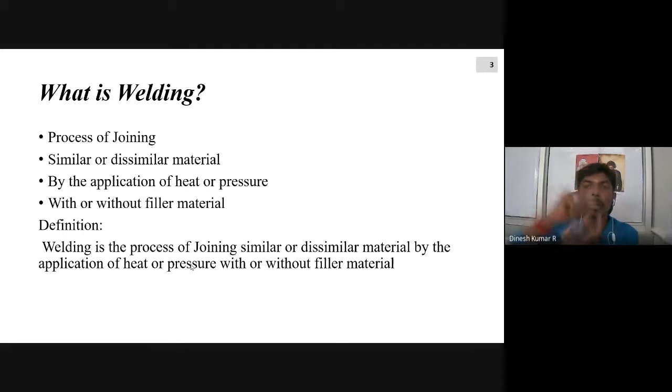So this is basically what welding has to do, and using this a lot of technology got developed. It's like basic welding process works on the principle of short circuiting, and what we are going to study today is completely on mechanical automation - you don't have anything related to current or electricity. There is a small friction which is needed to create energy. To explain this, in earlier days how we would rub two stones and create fire - same process here, what they do is plastic deformation. That is what is going to happen in the FSW process.

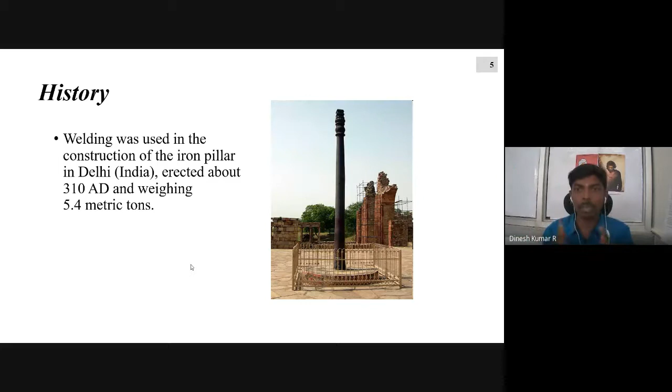About Indian history of welding - how many of you know this, I'm not sure. This is something which was erected in Delhi in 310 AD. This is India's first welding structure which was introduced in India. Before this, the concept of welding was nowhere in India - I'm speaking only about India. Before that, India didn't know the concept of welding. But to erect this, they needed to have some joints which were to be actually molded by welding. That's how welding was actually introduced to India.

After that, what happened - of course, there should be some evolution over a period of time. What happened was some forging technique was used, like it was heated, it was screwed, and it was joined.

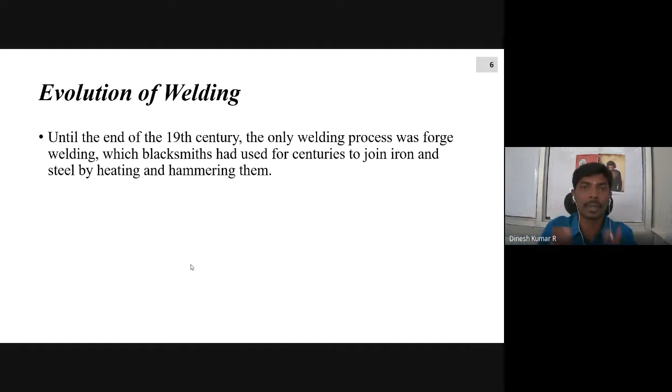There was introduction of gas welding, like oxyacetylene gas or manual metal arc welding. But earlier it was started with blacksmith welding, like in our blacksmith workshop, that was the first welding or joining technique introduced. There was an evolution, then there should be evolution to have these many processes.

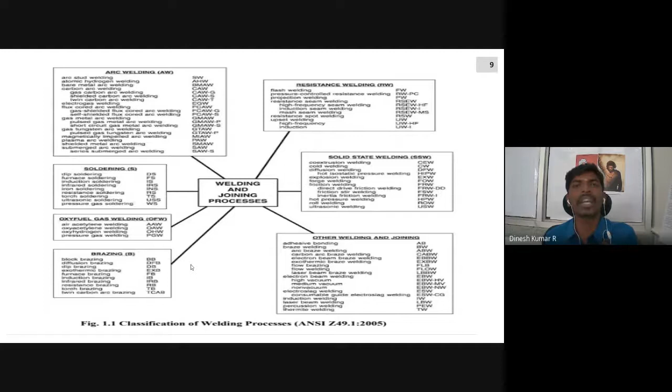So we got plenty of welding processes, and the topic for our discussion will be only based on solid state welding process, exclusively on friction stir welding process. Solid state welding process, as I said before, is like our blacksmith workshop welding, a blacksmith technique where they heated something.

They kept it together, applied some force, and both were getting fused together after solidification or after cooling, both making a bonding. That's how welding was happening earlier.

From that, what was created is friction welding, a further technology. What this does is, mostly dissimilar materials which cannot be welded together, they used this particular process called friction welding. Maybe you have seen this in a workshop where carbide tool tips are being brazed.

Earlier, during this particular operation, the tool tip was actually kept idle and the rod, like mild steel or HSS, was rotated, and both were brought together. At a point when both were getting heated up, they fused together. That's how this friction welding concept was working.

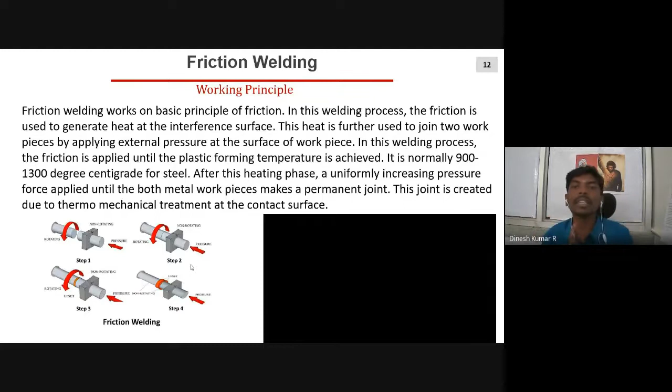But our process, what we will discuss today, is completely on friction stir welding. In friction stir welding, how does it differ from friction welding? Friction stir welding is just a stir technology which uses mechanical force or frictional force to join two materials. So the best advantage of this particular process is that it does not consider what material is being used.

This does not consider what tool is being used. This will not consider the aspect ratio of thickness. Now even 100 thickness can be done with two passes, where a single pass can weld even 50 thickness - there is no constraint in this.

If you go for manual metal arc welding or TIG welding or MIG welding, what is the problem there? You have to fill the material layer by layer, and over stages you have to keep going. That is what we call wire arc additive manufacturing.

When this process is running, what region do you get? Now if you're doing welding, you have a core like this, and you have to fill from here, then here, then here, then here. The problem that arises here is that there is an inter-bonding between this particular layer and this particular layer.

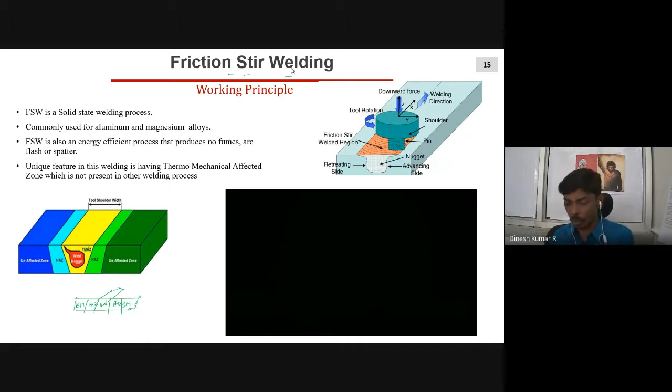So this was the microstructure we obtained during 2219 - yeah, aluminum alloy 2219, AA2219. You will not get this material anywhere. If you want to work on this particular material, you can collaborate with ISRO or DRDO. So they have this particular material.

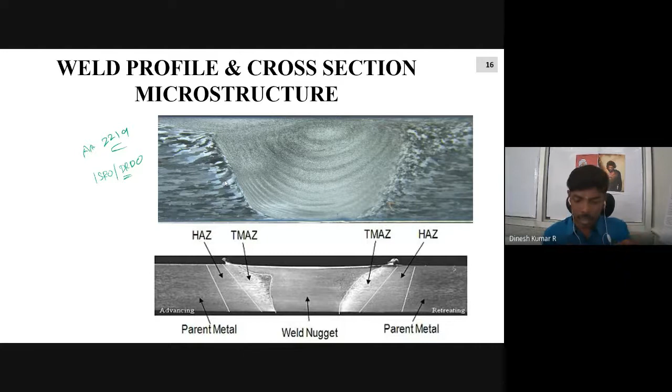The beauty of this material is what they call the ductile to brittle transition. When there is an exposure of change in temperature, this particular material has the property of achieving a better ductile to brittle transition across a wide range.

This is about, I just want to show what machines I worked on. This machine I worked on in NIT Trichy. We have a specialized FSW machine, and the same machine is available in ISRO as well.

For those who want to work on FSW, it is not required to only go with this particular setup. A customized CNC milling machine can also be used as an FSW machine.

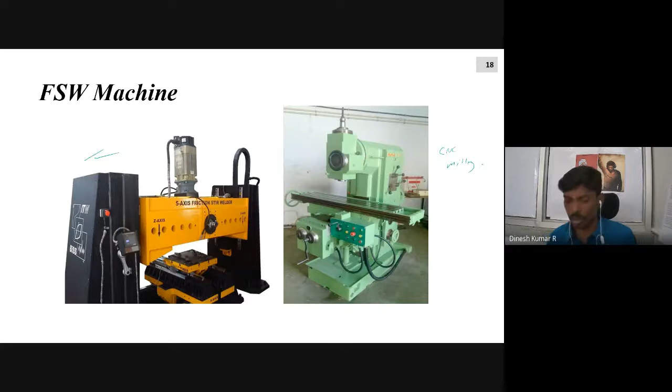The major joining process here is like other welding processes. You can go for plenty of operations, either butt welding or lap welding, where this process of making layer over layer gives rise to friction stir additive manufacturing (FSAM). This is a new trending technology happening in this field. It can also create many profiles - it's not that this can only be used for creating butt joints. It is also applicable for many joints based on the profile you require, right?

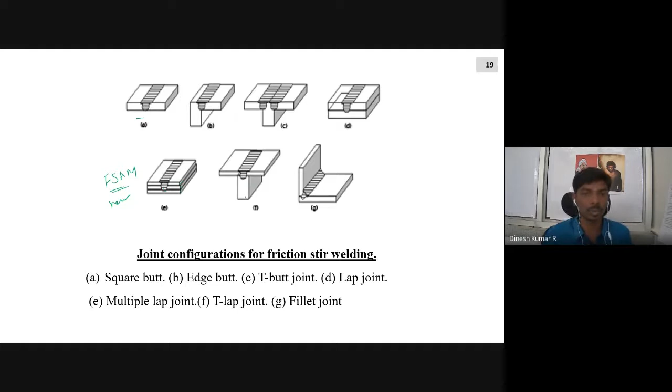If you consider the major parameters in this, obviously when you go for welding you have current or voltage which is controlled, the standoff distance or arc distance which is to be maintained, and the speed - the travel speed at which the welding happens. If it's going to be laser, what is the laser source you're going to use, or what is the focal point you are going to have.

So you have plenty of parameters which decide the welding impact on your material. Similarly, this FSW process also has some parameters attached to it. They are generally rotational speed, where the tool rotates at a particular RPM, then comes your travel speed - after rotating, the tool moves out with a particular travel speed, maybe say 100 mm per minute or 200 mm per minute. It keeps on rotating and moving.

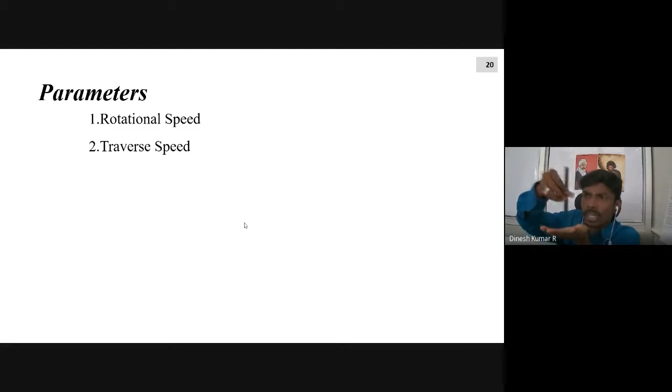Then tool profile. So if you consider tool profile, there are plenty of tool profiles. The best one is said to be tri-flute, which is quite costly and quite critical in manufacturing, but still we are quite comfortable with triangular or threaded tools. That is also giving better efficiency. Then tool tilt angle.

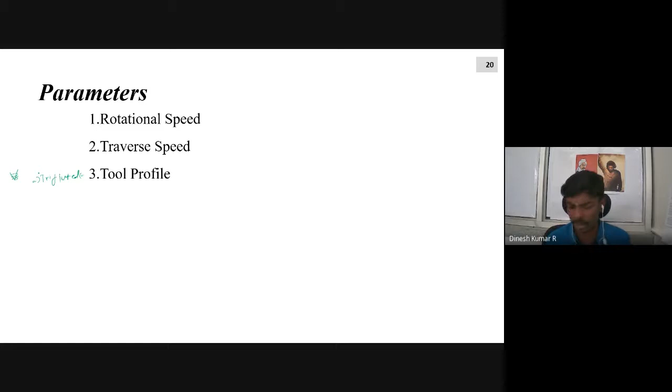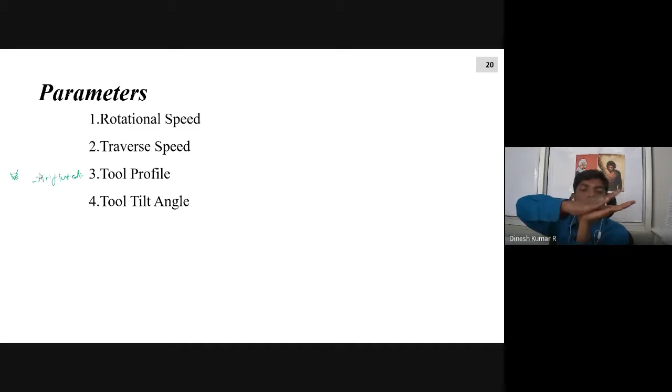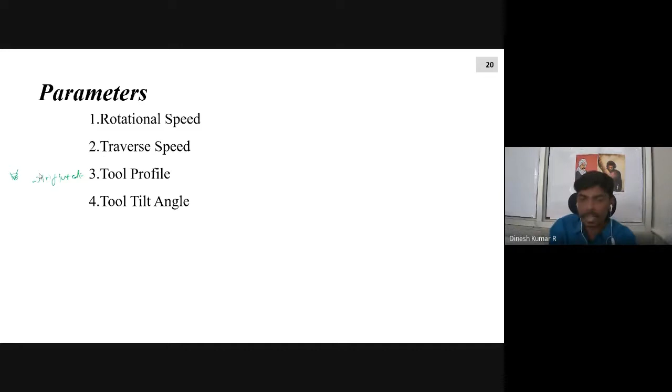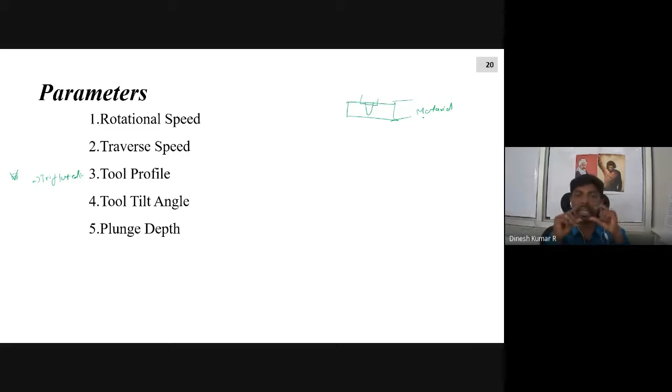It's like a boat structure, the aerodynamic shape where it slides at the front and compacts at the back. So we have one more parameter called tool tilt angle. Then plunge depth. For plunge depth, you have particular parameters where you want to do welding till this, and your shoulder will be resting over here. So what should be the plunge depth based on your material thickness? That is also going to be defined. For different material thickness you will have different plunge depth.

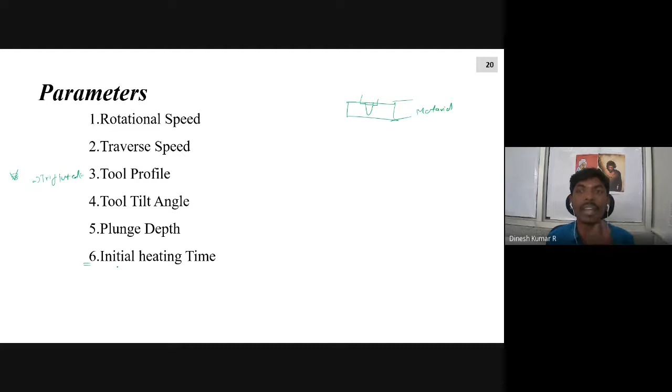Then initial heating time. What is this initial heating time? You are going to plasticize the material and fuse it. You are not going to completely melt it. You are just going to plasticize the material. You are going to introduce a tool, and heat is generated by the frictional force being created, and that frictional force is going to create semi-solid metal layers through the process. The time required for creating those semi-solid metal layers is called the initial heating time. With that, we'll have a clear understanding of how much it is required, and this can also give you a better result.

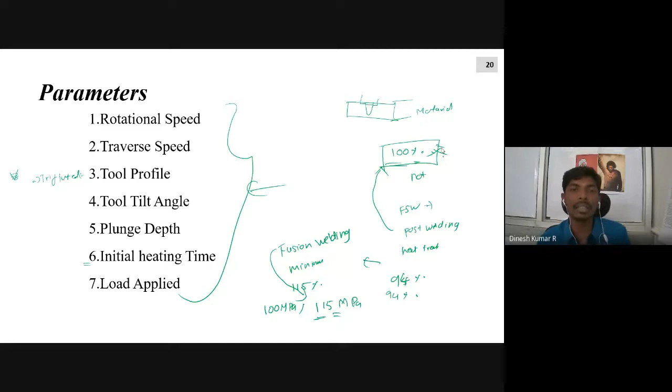When you are going for a bigger component which is a completely non-weldable grade, this is found to be the better solution. This process lets you join any material regardless of its characteristics, completely without any problem. But the only deficiency of this process is it will never get 100% efficiency unless some post weld heat treatment is happening. One more defect is end hole generation at the end of the process due to the impression of the tool.

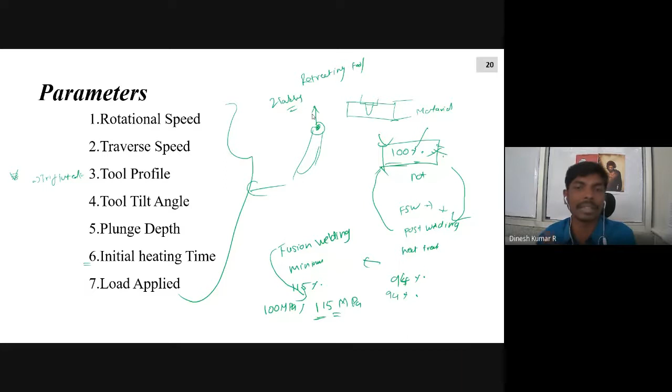This can be addressed by post weld heat treatment and by a retracting tool. There is a tool called a retracting tool; I'll show everything in future. That tool costs around 2 lakhs, so we Indians cannot afford 2 lakhs for each tool. So நம்மகிட்ட இருக்க டூல்ல we will always have this end hole formation. We use some jugaad technique to eliminate that as well. I'll explain the complete process and the journey I faced in ISRO.

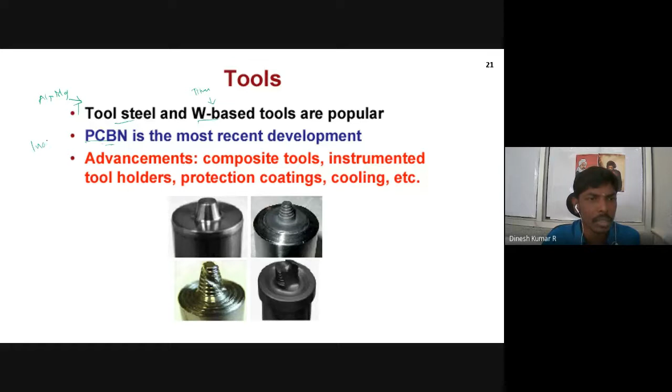These are the different tool profiles. Mostly PCBN, polycrystalline boron nitride, tungsten based, and tool steel are used. For aluminum or magnesium, tool steel is more than enough. For titanium based welding, you have to go for tungsten based. For inconels or super alloys, you have to depend on PCBN, polycrystalline boron nitride tools. These tools are quite costly. Ours cost around 6,000 per tool, and PCBN will be much higher because it is completely sintered and produced.

Profile பத்தின normally we are okay with this profile. Normal welding போகணும்னா this profile is more than enough. If you want better quality, you can go for this threaded one. Why threaded has better efficiency அப்படின்னு கேட்டீங்கன்னா, I'll give you one more example.

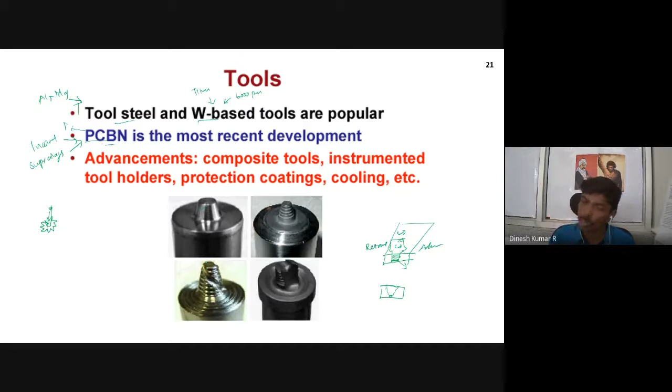If you look at the bottom, you will have some defect like a tunnel defect, where the rest of the things will be there. This is majorly because you have made a wrong threaded side, where instead of pushing the material down, it pulls the material. And if you look at all these, mostly everything will be created in order to push the material down, so that you will get a lot of input in getting it down.

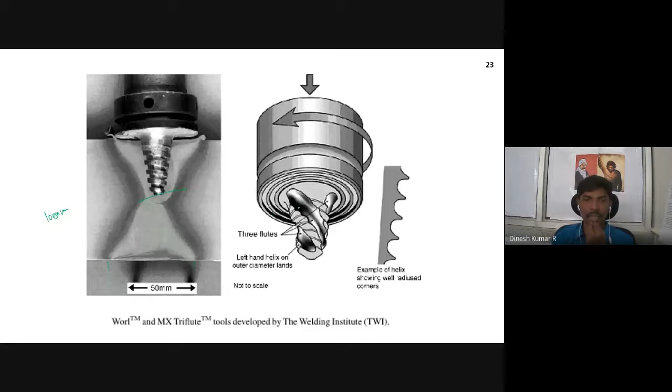And there is a ratio which can be maintained, where your shoulder should be around 3 times that of your tool. That is, if your tool diameter is 6 mm, your shoulder should be around 18 mm. This is the basic thumb rule which is to be followed in manufacturing any FSW tools, right?

So after that, this skew angle, like we started producing, because if we do it this way, with the eccentricity there is again going to be a lot of collision. There is again advantage as well as disadvantage because of the packing nature which is to be done. So in that line we can go on tool proportion.

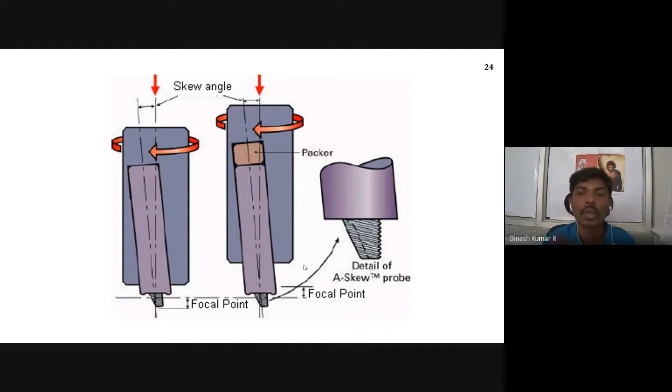So as I said, tri-fluted is the maximum, but we work on a maximum of 12 mm plates; mostly we'll go for 6, 4 or 8 mm, maximum 10 mm. That is all we are going to do FSW on. So cylindrical threaded is more than sufficient for our working nature of the tool, like whatever research we are doing.

Alright, another thing here: you should understand the basics of this particular process on metal flow phenomena. If you ask what the metal flow phenomena is, there are two types of metal flow in this process: a first mode of metal transfer and a second mode of metal transfer. The first mode of metal transfer is completely done with your shoulder, and the second mode is completely with your tool. So there you will have a tool locking mechanism.

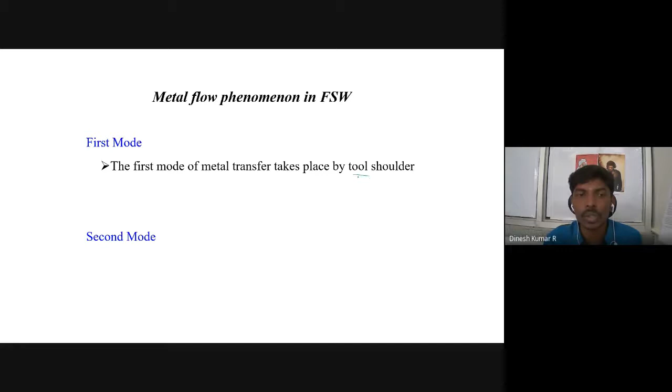The first mode will have a revolved profile where all the material is getting revolved, and the second mode of metal transfer will be completely compaction in nature, where the material getting skewed in is compacted and makes a flat profile. This is how your first mode and second mode differ. Your first mode takes place by the tool shoulder, at the top, and your second mode is at the downside, completely with your tool.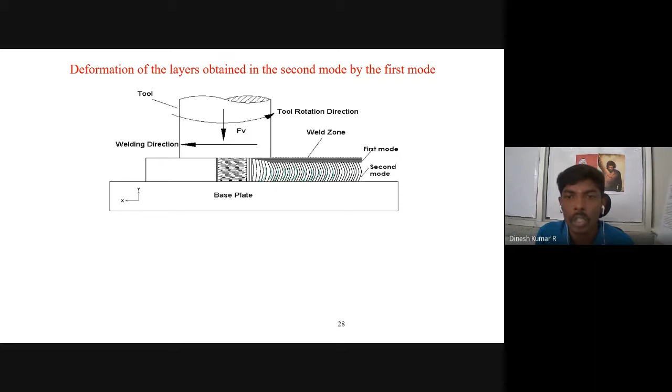So first mode and second mode of metal transfer is also a phenomenon where you can work on a few research aspects. So here you can see the first mode is something like this. Here in the second mode you will have materials over here, like this. So your second mode will be something like this, where all your materials are skewed or rolled around, and the first mode will be a flat profile where it will be completely compacted by the action of your shoulder.

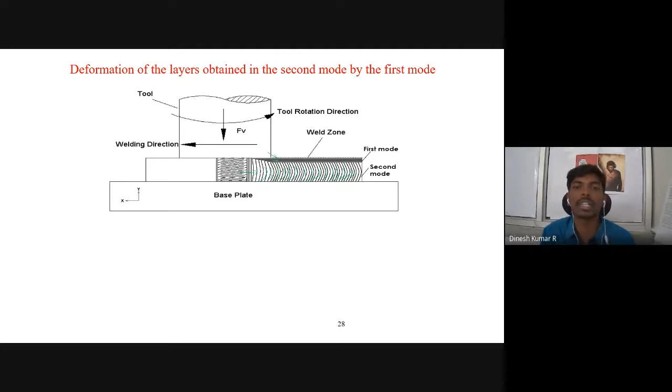That is what gives you your first mode of metal transfer, and this tool profile is completely responsible for creating your second mode of metal transfer. To understand this, the better efficiency can be obtained with your onion ring formation. Onion ring formation is also going to give a better impact on this. If you are getting a better onion ring profile, then your complete profile is said to be best on its own because of this particular welding process.

So to identify this, we are quite crazy in getting things. This was a trial done by our professor Dr. S. Muthukumaran from NIT Trichy. He was explaining to us how the first mode and second mode differ and what happens in the onion ring formation. So it is rolling of material; it keeps rolling inside. So we are going to look at its cross section. Whatever you see here, this is what is represented over here.

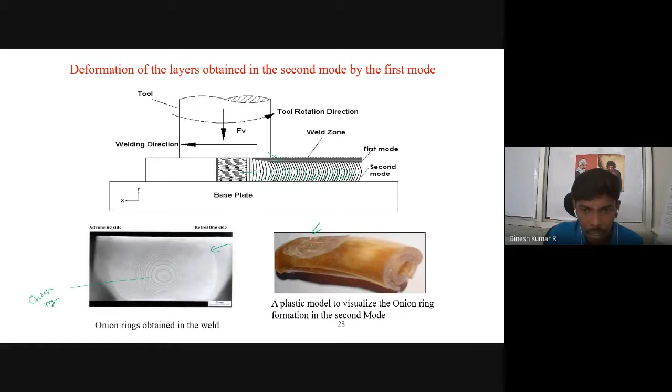The onion ring formed here is visualized like this in cross section. Right, again we did something on this fractal analysis, where for the first mode and second mode we introduced some MATLAB design with some coding using machine vision. Now people are doing it with machine learning. It was machine vision earlier, now it is machine learning to predict the feasibility that can be obtained

from this particular process. Right, that is all about how the process can be optimized or utilized if you want to do any research. And I think I have clearly given you the places where we make defects, like how to make a thread profile, how to make a profile, how to eliminate your defects. Those things were given to you completely to start up with your research.

Okay, now I'll explain what my research was and the journey I was handling. My clear objective was to weld AA2219. It is said to be a non-weldable aluminum alloy which has better mechanical properties from -250 to 260 degrees Celsius. They call it the brittle to ductile transition. When the temperature changes in a particular environment, the material will lose its property. When the material property changes, the ductility of the material will be converted into brittle nature because of the sub-zero temperature.

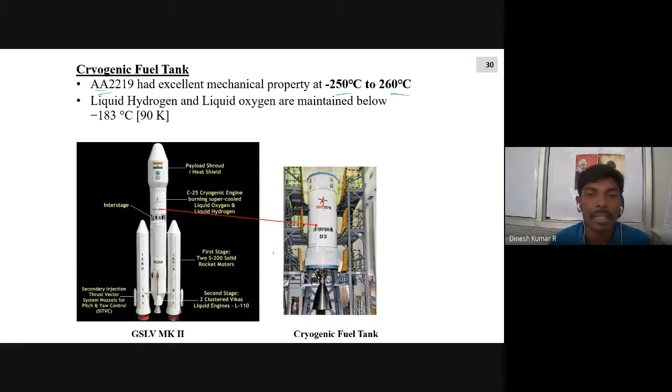So we were working on cryogenic fuel tank welding. In cryogenic fuel tanks, the liquid oxygen or liquid hydrogen is maintained at -183 degrees Celsius. If you go for other steel structures and the ductile to brittle transition happens, the steel will turn like glass. If you hit it with a small stone it will break. It becomes that brittle. So you should have a material which can sustain varying environments, either 260 degrees or -250 degrees, without any mechanical failure, so that when it is going to space it is not going to have any problem.

So we started working on this AA2219. Earlier this welding was done with the TIG welding process, where they were getting only 40% efficiency because aluminum TIG is possible only with AC welding. Our prior focus was to increase it to at least 80 to 95. But we were not able to reach that much; expectation and reality are two things, right? For AA2219 we got around 75% efficiency, and for dissimilar welding of AA2219 and 2014 we got around 88% efficiency. I'll explain how we achieved that level.

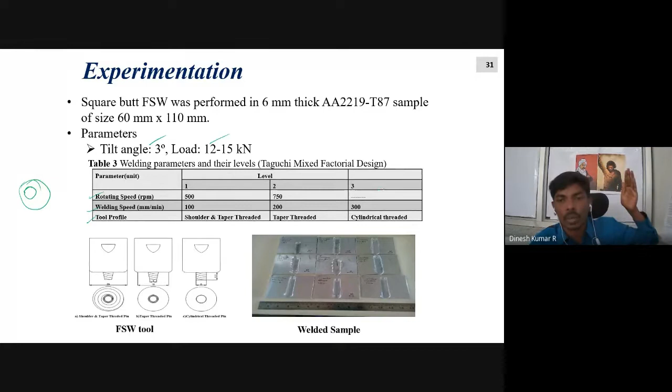We did a lot of trials optimizing the process, and we fixed the tilt angle at 3 degrees. We kept the load stagnant at 12 to 15; it was auto-generated load because we kept it as position control. So we were majorly focusing on rotation speed, welding speed, and tool profile to get our output. Before getting the actual welding process design, we worked on different sequences for optimization. We did trials from 500 to 2000 rpm, then 100 to 500 rpm, and found this particular range far better.

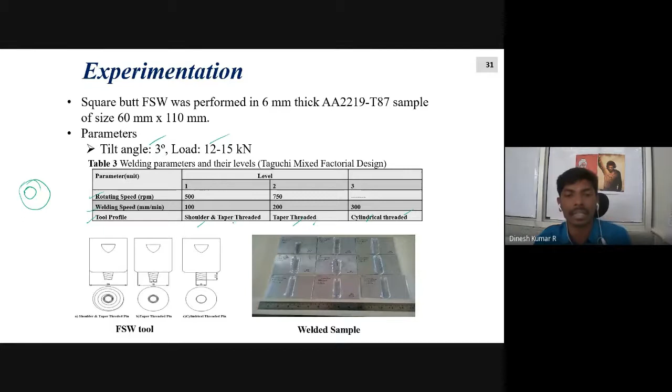We eliminated a few stages, narrowed to this domain and compared three profiles. Some people said the cylinder tool is good, some said taper is good, and a few said threaded shoulder and taper gives much yield. But we had to try what actually happens. So we welded and got some better parameters. Then how to improve it? Once your welding is done, you are getting a perfect weld without any defect, right?

Is that fine? Can you conclude your process with that? No. You have to further optimize. How to optimize welding sequences? You should know the behavior of the material by doing mechanical or material characterization. After that we started bisecting the material, and tensile specimens were tested. After that we went for cross sectional analysis.

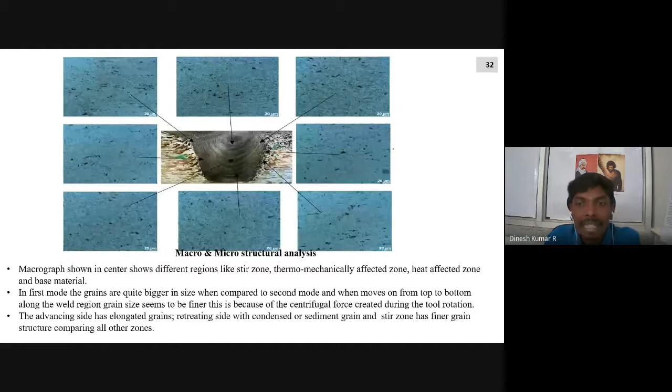But on the other side, this is like the advancing side where there is a pull effect happening. So material is getting pulled and here the material is getting sedimented. So the pull and push grains are seen over here. இங்க மெட்டீரியலோட சைஸ் டிஃபர் ஆச்சு. ஓகே, மைக்ரோ ஸ்ட்ரக்சரை வச்சு we are not able to predict what is the actual defect which is happening in this process.

Then we went for the SEM analysis. In SEM analysis what we observed is there are ductile and brittle regions, like slide tear is obtained and ductile dimples are also obtained. இந்த ரீஜனுக்குலாம் dimples அப்படின்னு சொல்லுவாங்க. அதை பிடிச்சி இழுக்கையில there is a void which is being created. அந்த குட்டி void formation-ஐ dimple-ன்னு சொல்லுவாங்க.

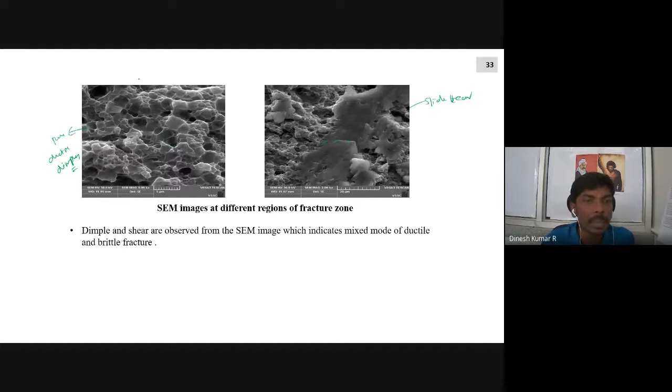இன்னொரு சைடு பாத்தீங்கன்னா this is completely behaving ductile and this is completely behaving brittle. On the brittle side there will not be an elastic limit. நம்ம பென்சிலை உடைக்கிற மாதிரி டக்குன்னு உடைஞ்சிடும். Like glass getting broken: when you test your material it will elongate and break, but when you test glass the elongation is 0, it is completely brittle. ஒரு சைடு பிரிட்டில், ஒரு சைடு டக்டைல், that is a mixed mode of transition happening in the process.

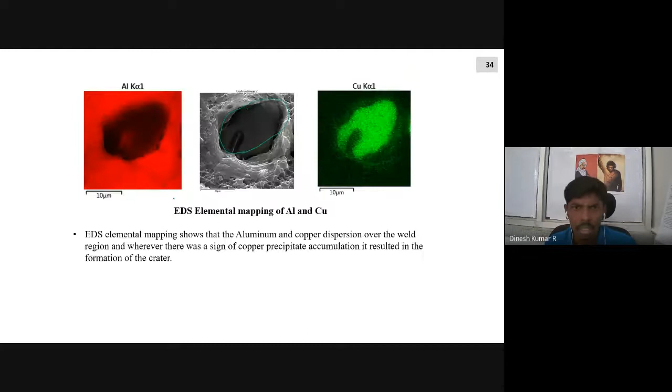அங்க பாத்தீங்கன்னா the scale is 5 microns, the scale is just 10 microns. But our void was more than 10 microns. Come on man, your crystal size is not more than 7 to 10 micrometers, but you have a 10 micrometer void created within your process.

இதுல ரெண்டு விஷயம் இருக்கும். One, your process is not sufficient to get complete packing, but that is not possible, because we have gone for testing. There was no actual defect, no tunnel defect. Then we went for RT and UT, radiography testing and ultrasonic testing. Both found there is no defect in the welding process. So we found there is some crater being generated in the welding sequence that is the major source of failure.

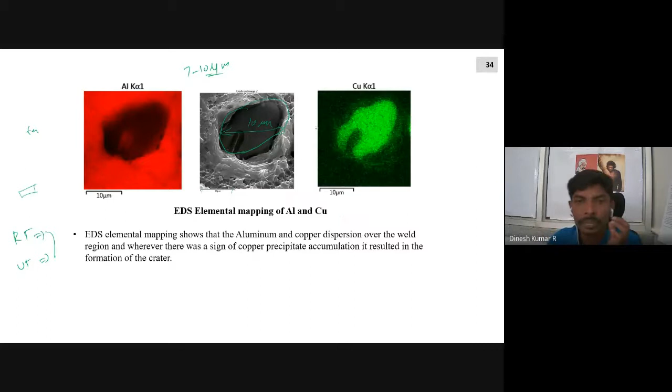இந்த ப்ராசஸை எப்படி ரெக்டிஃபை பண்றது? We were brainstorming. Luckily we came to know that the major composition of this is copper. எப்படி காப்பர் உள்ள செடிமெண்ட் ஆச்சு? It's an aluminium copper alloy where you have around 6% of copper throughout.

Due to the centrifugal force, the saturated copper started getting accumulated or agglomerated at a particular point, and the weight ratio varies. The copper will be higher than the aluminium. When it's heated and refined, that portion of copper started accumulating in a particular place.

When you have a complete crystal with a small dent, breakage happens only at that spot, there is no proper bonding. Rest of the material is similar, but there is one inclusion or foreign body entrapped in the material, and at that spot you will not have enough bonding.

What is happening is it creates a crater because of the accumulation of copper which has only partial connection, not having better connectivity with the aluminum, creating a small loop. The failure is maximized there. So the only aspect is to disperse this copper which is getting accumulated or agglomerated in a particular point.

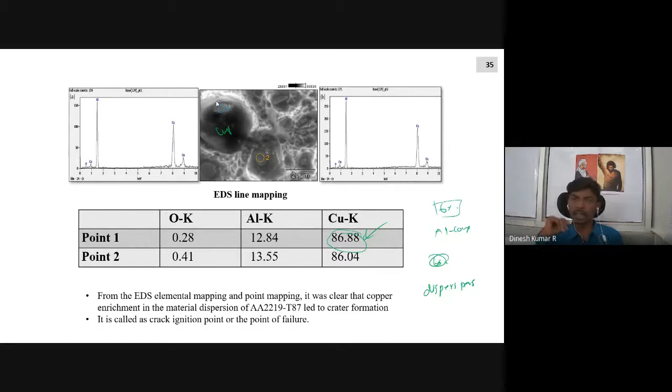Only thing we have to do with the tool is, like when we churn curd well, it gets dispersed and comes out. But if our tool profile is different, then only in that spot it will wrinkle off and generate. The same thing we were applying here.

Here what happened is the profile that was created was not good enough in order to split the copper precipitate or disperse the copper precipitate uniformly. So we started introducing a flute like

a small flute-like pulsed mode we started introducing. Earlier the tool profile was continuous, so it was going on a continuous process. Then what we did is in this particular tool over the string we introduced a flute like a small cut. So what happens is it will create a pulsating action where it is not a continuous flow, it is going to be a pulsed flow.

In this we were not able to get a better efficiency - this is all we were able to achieve. Around 75% of the parent material strength was able to be applied.

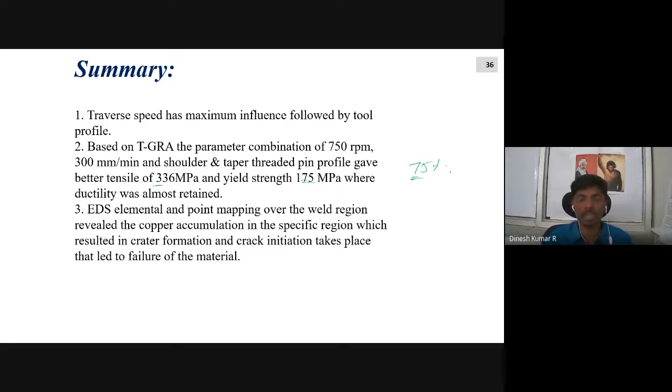Then we tried adapting that particular process on dissimilar welding. This was still more complicated because this is not the same material. With the same material at least stick welding is possible. This 2014 and 2024 are two materials which are called structural elements. It is completely impossible to weld with any process. Even TIG welding is not possible for this.

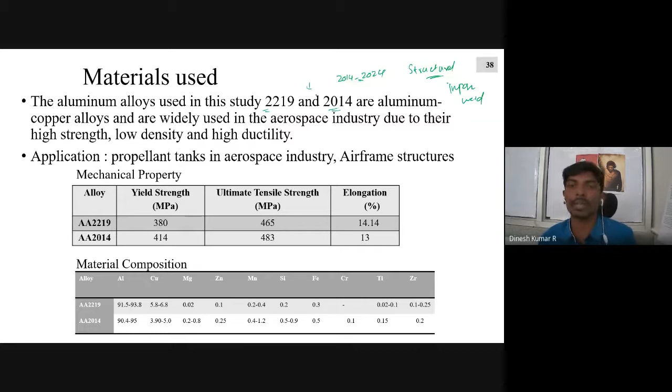In the process we thought that when you go for higher complexity, you will get a better result rather than working on the same result for a period of time. So we planned to take this up. Okay, we'll go with this particular process.

In heat treatment, if someone is doing research and not able to spend more amount for procuring tools - if you use the heat treatment method, the total production cost of the tool will be just 300 rupees, where your machining cost for this particular profile creation will be around 150, material charge will be around 70, and heat treatment - if you have that, you can avoid the rest. If you use the heat treatment procedure, you will get a tougher tool, far better toughness.

If suppose you are using one tool for producing 10 weldings right now, that is highly impossible in FSW because the breakage happens simultaneously. But if you use this tool, I can assure you will get at least 10 to 15 weldings. So this tempering process we used for D5 tool steel.

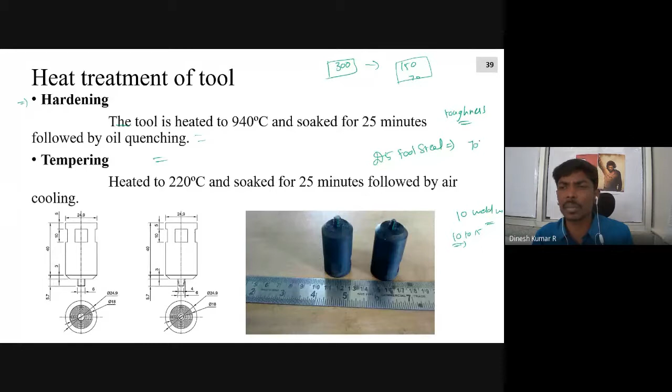There it looked rough. We thought this is not as good as 2219. But we all go with the beauty, right? Beauty is dangerous - that applied here too. Which was beautiful, which had better finish at the surface, that was giving only 75% efficiency. This one was not beautiful, the finish was not proper due to mixing of two materials. There it was only 2219, a single material used. Here it is two materials.

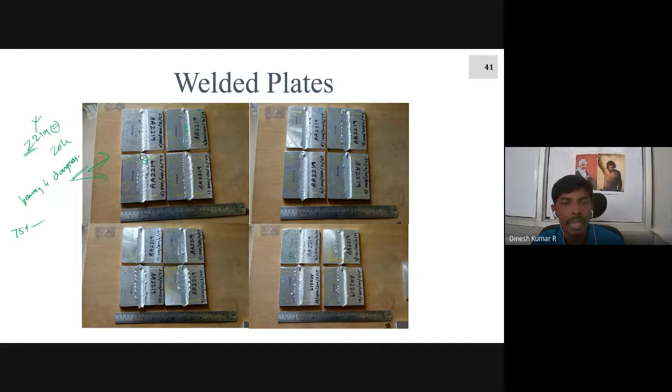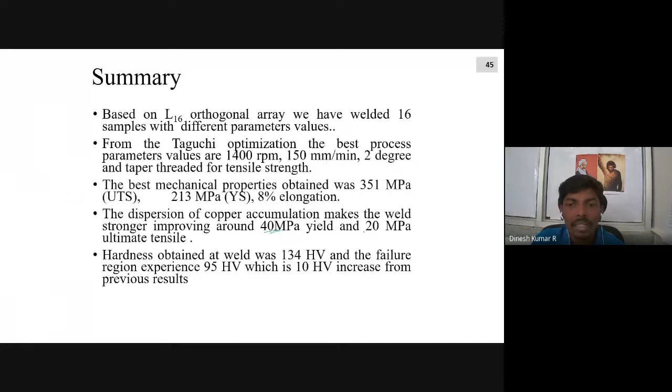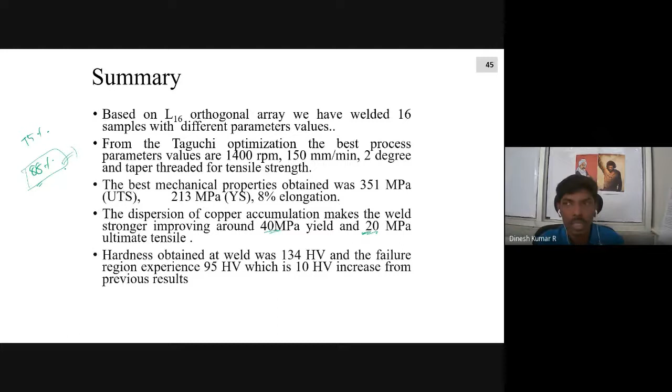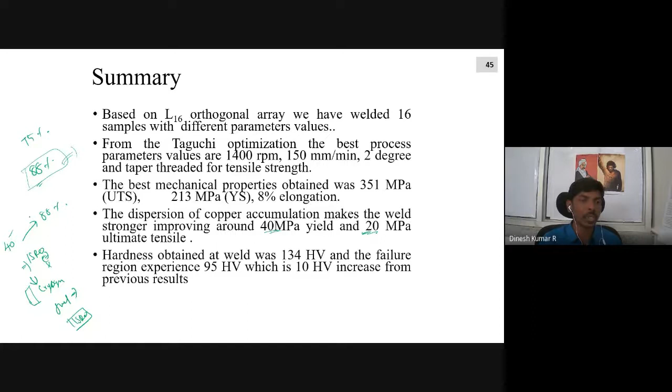So our efficiency gradually increased from 40 to 88%, and now I'm very happy and proud to say this technique has been adopted by ISRO and validated and accepted. Now the joining of cryogenic fuel tanks - few of the fuel tanks - this technique is also getting incorporated in ISRO for manufacturing their fuel tanks, or joining their fuel tanks to get the final output, by increasing efficiency from 40 to 88%. These are about the research I worked on with 2219 and 2014, the difficulties we faced during the journey, and how different aspects were handled to get a product specific output.

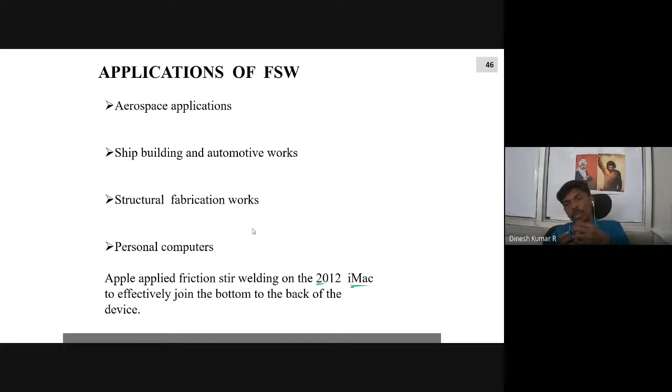So about application - sir, you've done this in ISRO, where all can we apply this - there's plenty of applications starting with aerospace, shipbuilding, structural fabrication. In 2012, Apple used this particular technology for joining the bottom plate and the top desktop with the FSW process. They joined using this technology to fuse both aluminum pieces. So it got wide application everywhere - if you go for aerospace, space capsules, trains or ships, everywhere it has its own applications.

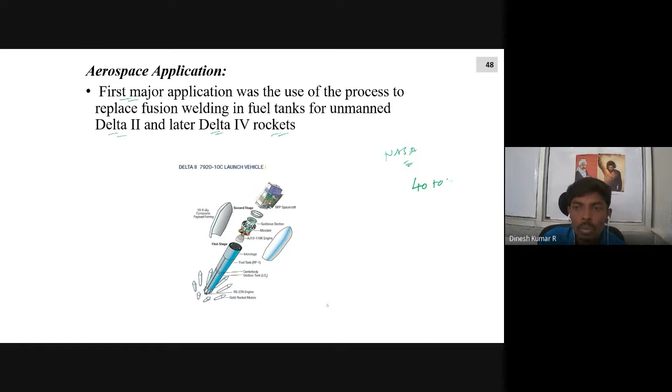The major application in aerospace was in Delta 2 and later Delta 4 rockets. NASA was the first to implement this particular technology for aerospace applications using the FSW process. Right now, around 40 to 55% of the welding of aerospace in NASA is only with this particular technology. They are not using any other technology - they are using only FSW technology for most of their welding components.

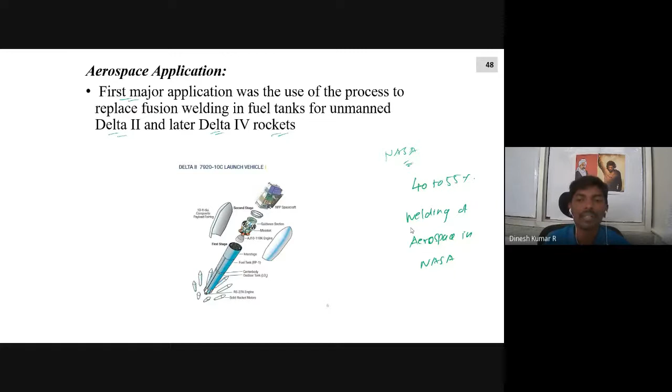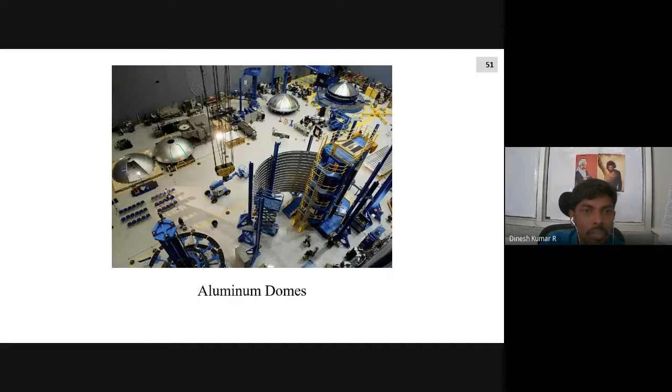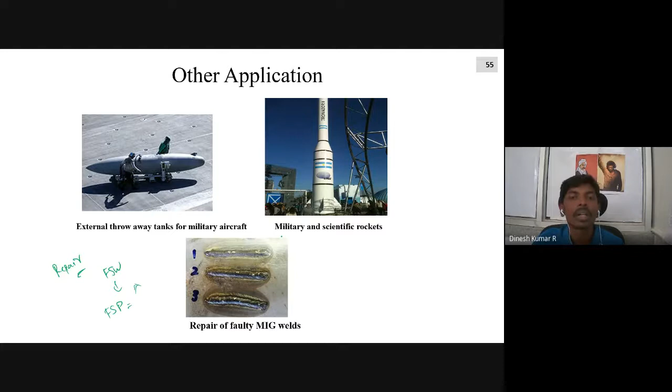Now in our normal fusion welding process, if we get some defect like a blowhole or something, instead of throwing away that welding or reworking on it, if you go for FSW over that particular welded zone, doing FSW on the weld zone will repair your defects and you will get a better weld strength over there. So that is also possible right now.

All right, this is completely about friction stir welding. Other technology available in this is friction stir spot welding, where mostly now Maruti and Hyundai are getting adapted to this.

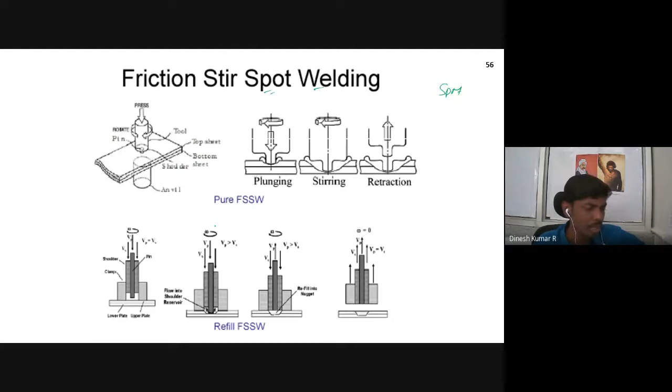Instead of normal riveting and spot welding, companies started using friction stir spot welding. The Mazda RX-8's rear door aluminum panel is completely made using friction stir spot welding processes, and companies are slowly getting adapted to this.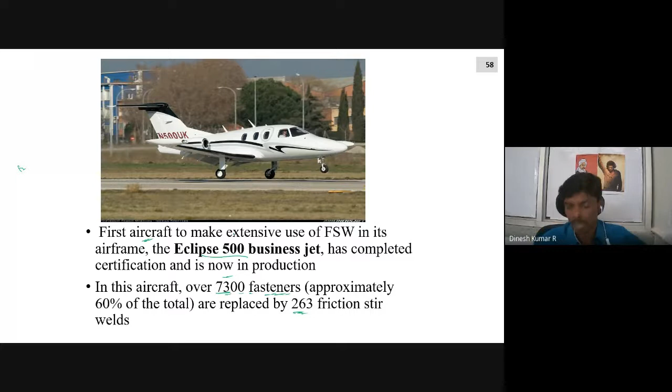The first aircraft made with this technology - if you've traveled in flight and looked at the side wings, everything will be riveted, not nut and bolt, because it has to be rigid. Almost 7,300 fasteners were removed and replaced with just 263 friction stir welds in Eclipse 500 business jets. This was again a glow moment for this particular technology.

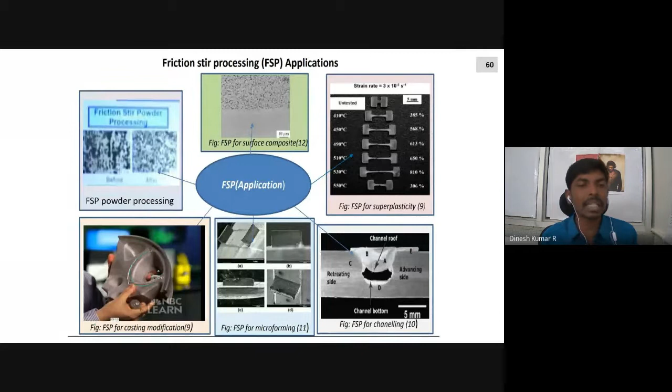Where there is a casting defect, you don't want to rework it again, or throw it, melt it and reframe it. Instead you can go for FSP or FSW process, where FSP can remodify the defect, like repair welding - it can be used for remodifying the defect in that sequence.

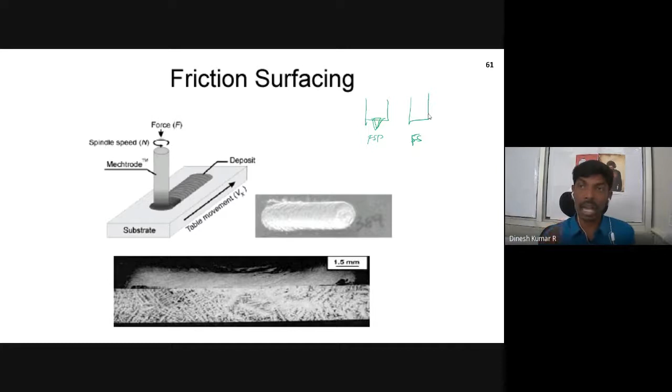The difference between friction stir processing and friction surfacing is: in friction stir processing you have a tool pin, but in surfacing you have only a flat surface. It will just grind over the surface, altering about 2-3 layers. That is the difference between the two.

One more technology available in FSW is tube-to-tube plate welding, patented by Dr. Muthukumaran - welding of plate and tube in a single FSW process. This is the holistic arrangement made, where the top layer gets fused to the pipe, and a joint happens in this particular region. So tube-to-tube plate welding is also possible.

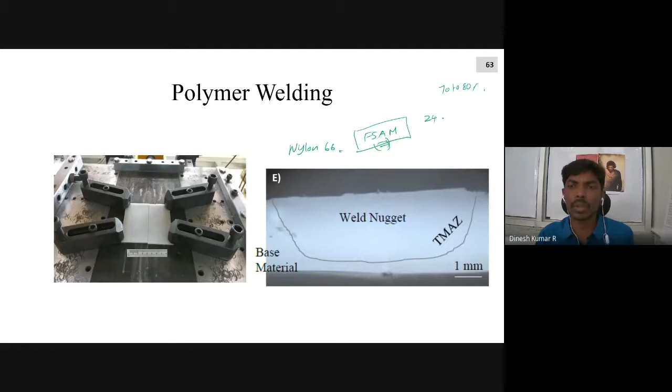I have also worked on polymer welding - one of my seniors was working on nylon 6/6 material, and we adapted friction stir additive manufacturing process for this. When welding plastic, it was like poking a hole and getting a small droplet, so we weren't able to get a perfect weld. Then we went for friction stir additive manufacturing technique to get a proper weld zone, achieving around 70 to 80% efficiency, where earlier it was only 24 to 26%. So we were able to achieve this in polymer welding processes as well.

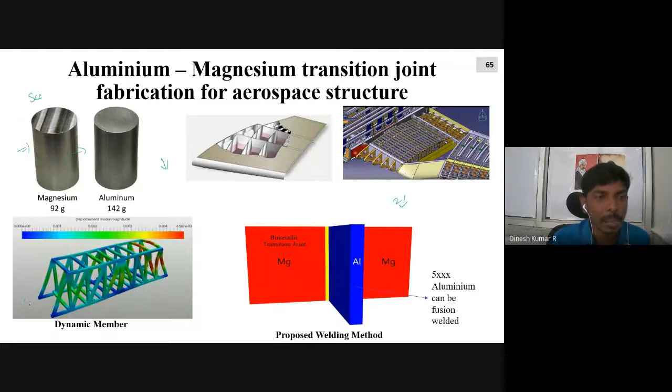Magnesium can replace aluminum, because in future you will not get much aluminum; we have to replace most of the aluminum with magnesium. And it is a myth; people say that magnesium is highly explosive and it burns, it cracks. It will not happen. Even for engines, people are now using magnesium engines instead of aluminum, where you have continuous sparks happening. Magnesium sparks only when it is in powder form, not in solid form. So that myth has to be eradicated from your mindset if you want to gradually move on from aluminum to magnesium, which has a better scope in the market, right?

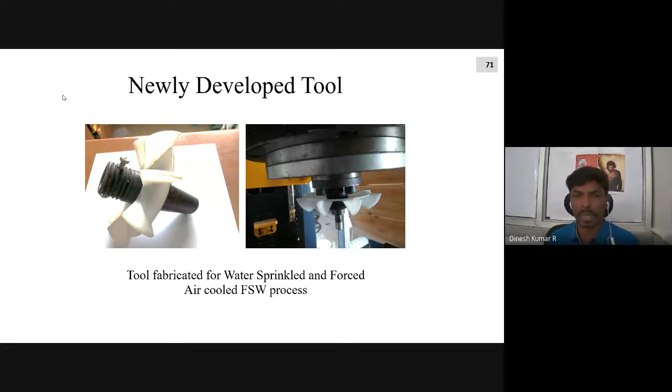And a few technologies we have developed, like new proposed tools, and micro FSW with the bobbin tool variety, which doesn't need the support clamp structure we usually have. You don't want any support, you can directly go for welding with this bobbin tool variety, and we are trying this in micro as well.

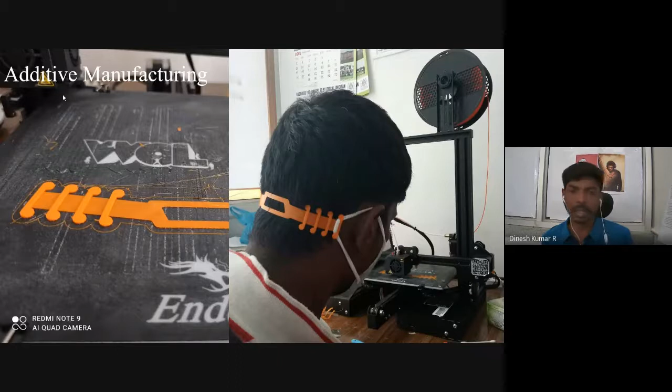And apart from that, we work on a few designs in additive manufacturing. This is a small design made in our laboratory, and we were using this during COVID time, and we were even giving it to our staff to use as a clamp when there was scarcity in Amazon or local shops. We were not able to get everything, and people were heavily impacted. So we were creating this as well at that time.

So this is all about my lecture. If you have any doubt, you can ask.

Thank you, sir. Thank you. Dear participants, any interaction? Very useful presentation. Thank you. Any queries? Thank you, Nagarajan sir. Any other queries? Learned a lot, sir. Thank you.